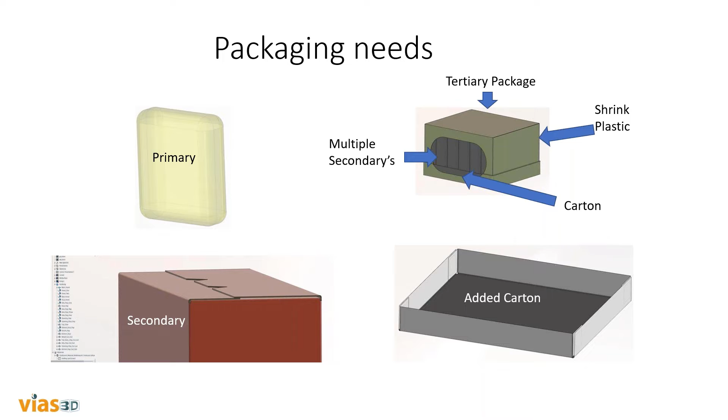And if you look at packaging design, you can see that, first of all, I've got a flat panel and then a bunch of edges up or flange ups. And that's pretty much how this one's made. And then I've got some cutouts. And this particular one I parameterized everything. So anything that you want to control from a parameter you can. And later on, we're going to dip our toe into simulation and look at how that can be optimized.

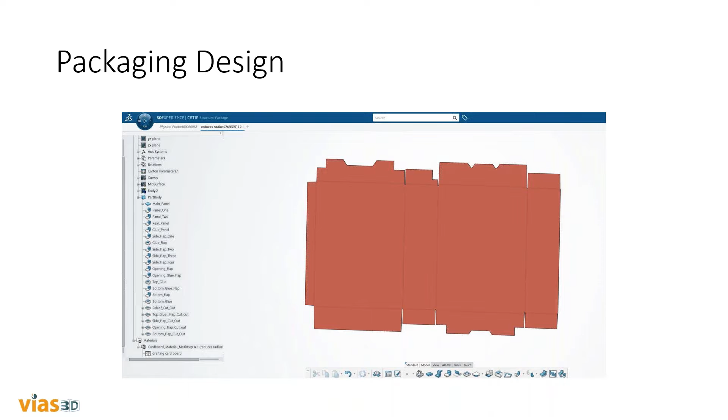Some of the tools that we can use, and these will look familiar to you. The carton parameters is right where it starts. You have a choice to use solid material or perforated material or corrugated cardboard. So you can use either, and there's some rules, and we'll look at what those rules look like in the next couple of slides. And you can put any number of rules in. It's simple to do, and there's not a lot of scripting needed. You can just add stuff.

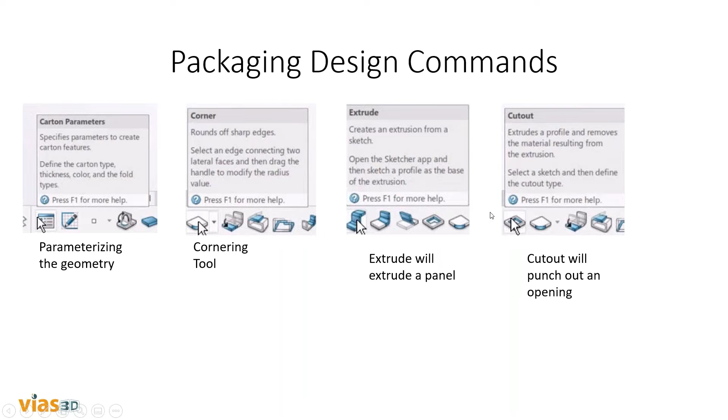So then we have, of course, a corner extrude, which will extrude a panel up, and then a cutout, any kind of a cutout that you're going to make. Fold and unfold, of course, is paramount to this whole thing. We're trying to get a flat pattern to maybe use on a cutting plotter, or you're going to create a die for it, a steel rule die or something like that. So you also have fold, which is going to fold from a line just like it does in sheet metal.

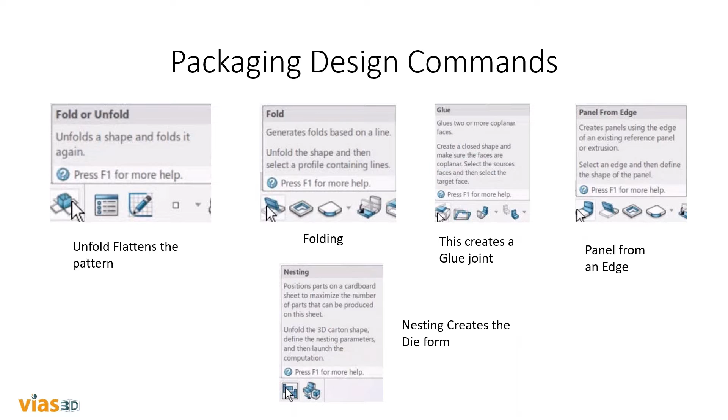So the panel definition, again, allows you to choose from full or corrugated. Full is just a solid thickness. You can choose the thickness of the material, and it comes with default rules, which are pretty simple and actually pretty accurate. So you can create different rules here if you had a different material type, depending on what you were doing. Maybe you've got cardboard with wax coating, or corrugated with plastic. These things would create different rules.

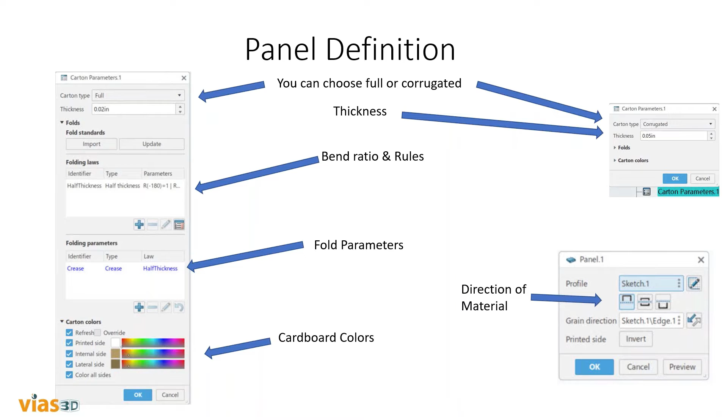And then of course the colors of your cardboard. When you choose cardboard, it's usually one color on one side and another color on the other, so it's easy to see what's folded. And then of course we have our panel up. Just like anything in CATIA, you can go either direction on the sketch. You can be in the center of it, on top of it or below it, and then you can invert it.

And then, like I said, my favorite function is the panel up function. This allows you to quickly take a square piece, panel up your edges and fold the box up very quickly. You can create boxes in just minutes by doing this, if you kind of have an idea of what your dimensions are.

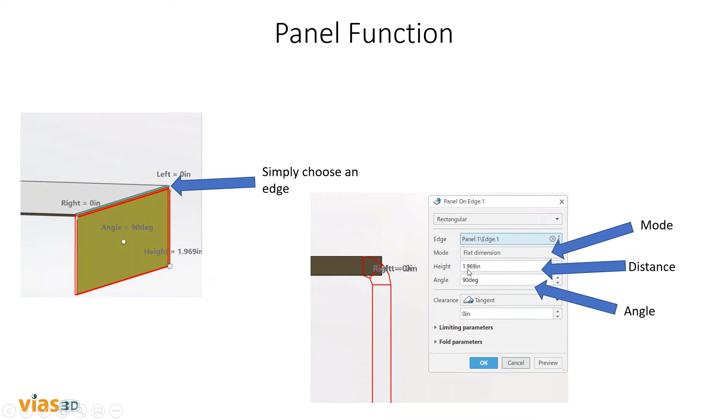Or maybe you have some standard box sizes that you can just put in. And again, all of these things can be parameterized. Well, at least height and angle can, and your tangent number. So obviously these are pull downs and choices, but the rest can be parameterized and connected just like any other parameter.

So the reason I like the panel up function is that you can control whether you're going above or below the area and have a number in there for that. Again, that can be controlled through a parameter. So it's really easy to make flaps just touch and get your exact corner radius. And this is where the cutout's important in the material. If you try to fold this up without a good radius here, it will tear, and you'll see it.

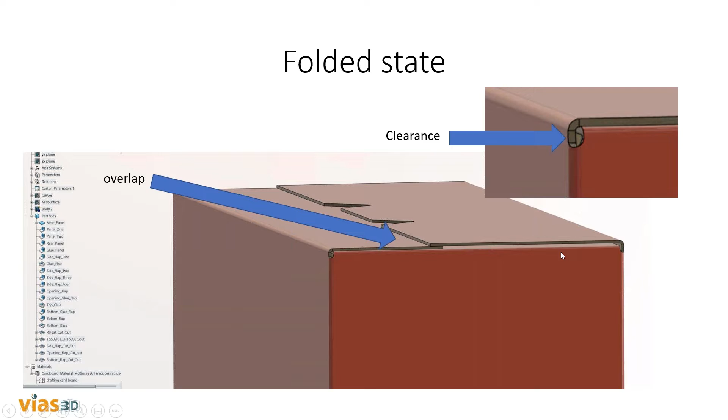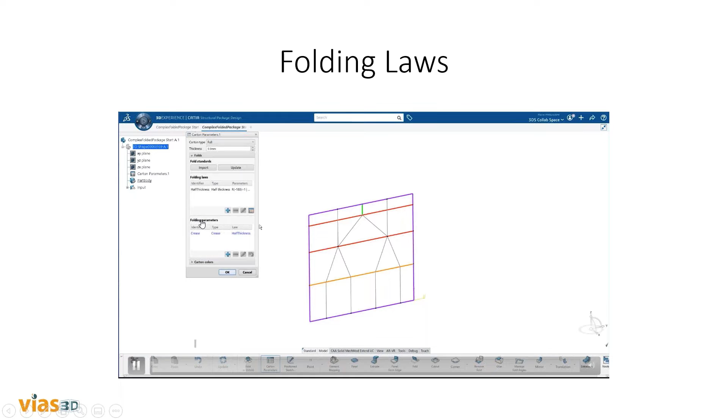And now we're going to get to the videos. So these videos do it a little bit differently. They don't work from a panel. These are going to work from taking a sketch with all the folds on it already. This one's kind of quick. You're just going to put in the rules and the laws, just like I showed you. And that's how you set that up. Tell it what type of material it's going to be and what your basic functions are going to be for rules. Here they're adding a rule, folding law. It's not that hard. If you know what your data is going to be, you can just put it in there. And so when it folds, it's going to follow that.

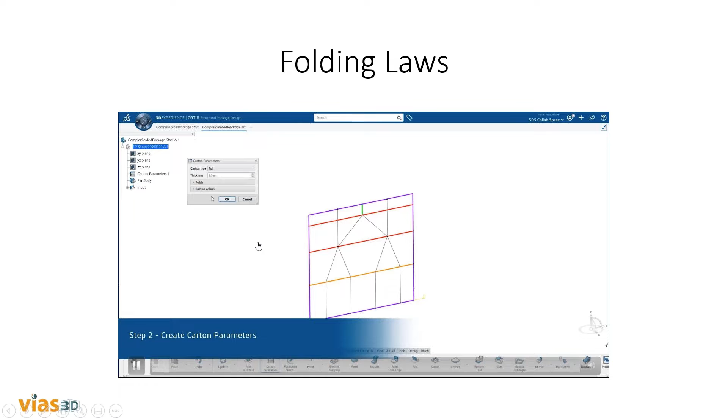So the next video is creating the panel. This is quick and easy. You just choose it. Again, you go up, top or bottom, make it go which direction you want, depending on how you're set up. And that's as simple as that.

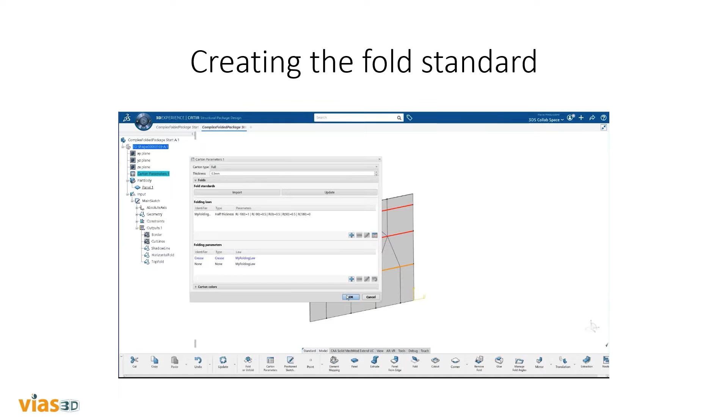Now, creating a folding standard, this is where you can start to use parameters, and what you can see is what you're going to be able to control here. This is where this tool becomes more important, because all material works a little bit differently, so you're going to have to come up with what works. And you can see that they've got 3 separate sketches here. One was the panel, one's the cross folds, and then the other folds. And they're going to control these folds a little bit differently. What they're going to show you is how every time you pick on an edge, you can choose different rules and laws.

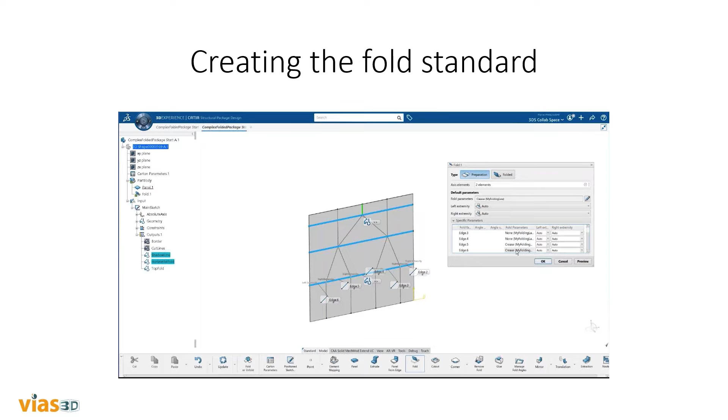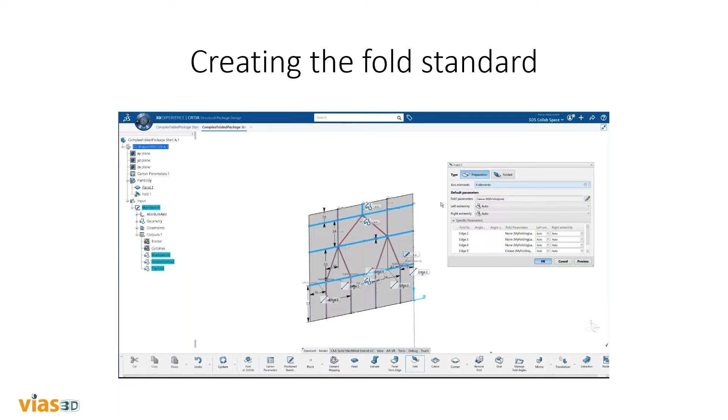This is great for control and optimization later, when you can parameterize these things and bring this into a simulation and see what happens, maybe putting material in it or something else, and you can make changes. Maybe your seams are too tight and they're going to tear once liquid's put in them. So there could be a lot of reasons why that might happen. And this is why the connection between design and simulation is important for packaging.

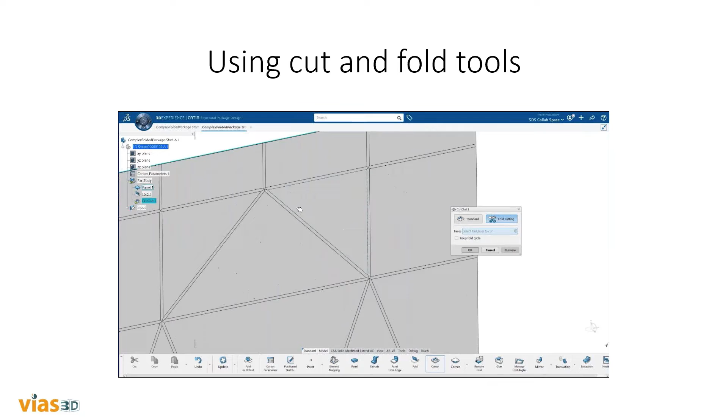I'm going to create some folding standards, using the cut and fold tool. So you have to make cuts. And so here, this is going to cut out where the folds are. It's not going to create a larger radius, but depending on what type of fold this is and how thin the material is, that might work fine, just cutting that out there. It's a pretty simple tool.

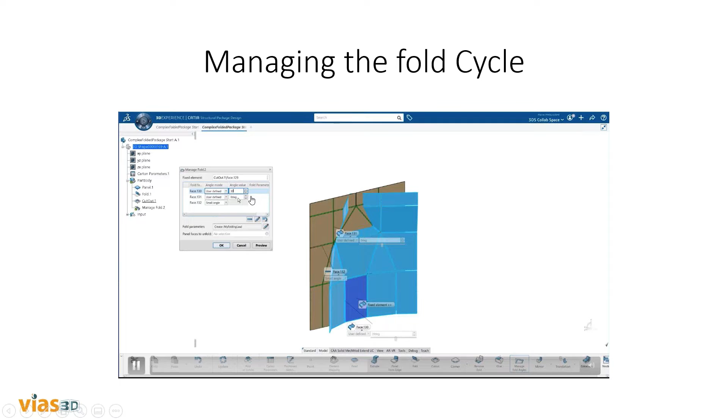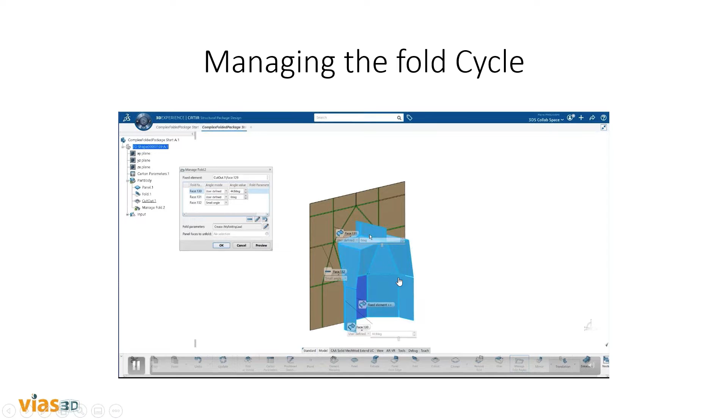Managing the fold cycle, this is where it gets a little bit more complicated. So you can see this is where you can actually keep this up and adjust these, and you'll get a ghosted image to show you what it's going to look like folded, right? Just like that. So you can actually use the adjust button up or down, and they'll do that here. Get it right where they wanted to put it. So you can adjust those up and down just to see what the result's going to be like, and then go from there.

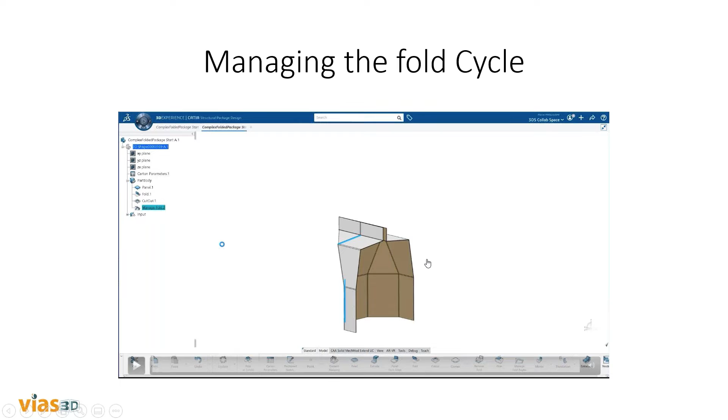Okay, so the mirror function is pretty simple. They show this twice. I cut out one of the videos because I think everybody knows how to do this. It's just good design, for anything that's going to have symmetry to it, to only design the areas that you need to. It's a lot easier to control. And if you don't have to draw the entire thing, why do it?

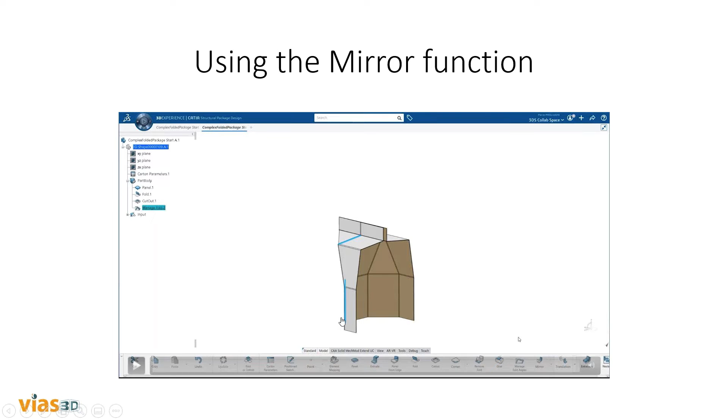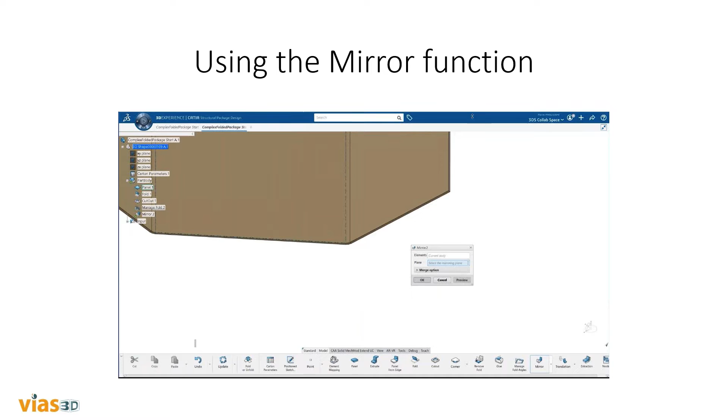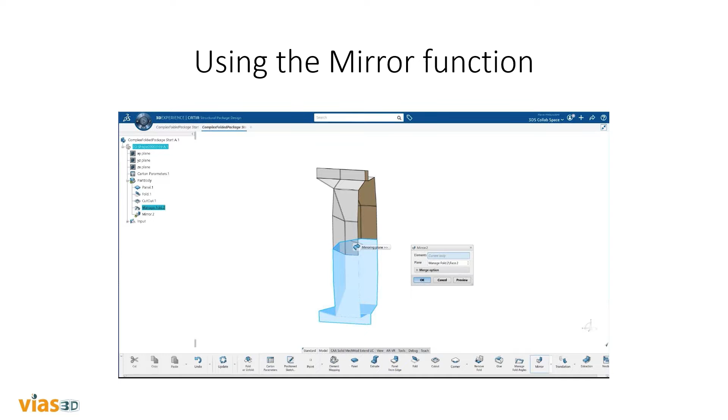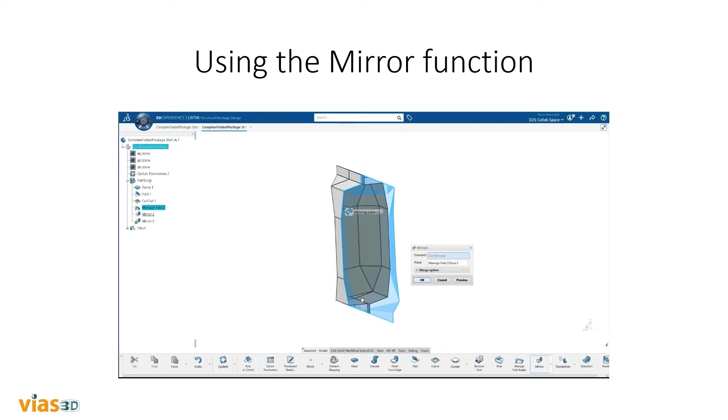So this is kind of a basic function here they're going to show. Not much you guys don't know. In this case, they drew a quarter of it, and you're just going to mirror it right on the edge. And then all this. So this happens to be like a protein drink type of a box made out of paper. And you'll see in the next couple videos what it's supposed to look like and how they come up with it. So this is probably very thin cardboard with a wax coating. Right? And so then you get your whole piece.

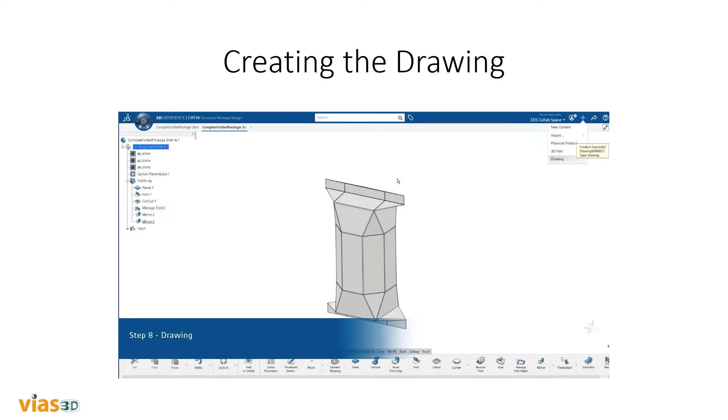So once you've got your complete component, putting this on a drawing is really simple. You just unfold it, if you're looking for a DXF file, or you're going to just plug it straight into a cut machine, or whether you're going to nest it. So create your flat pattern. Just choose it. Tell it you want it in the open.

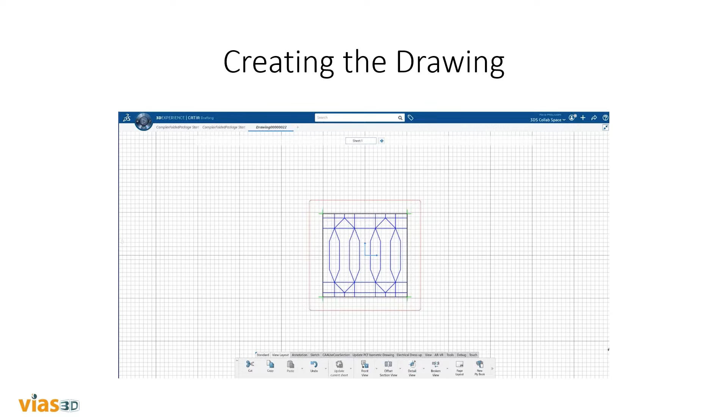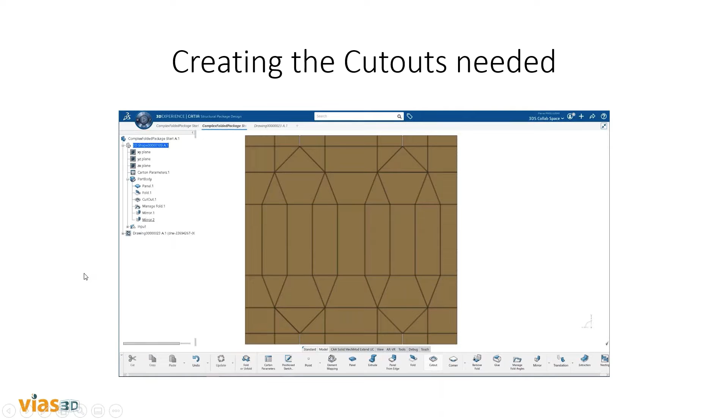And of course, our idea here isn't to show you drawing, but this will give you that pretty easy, so you know what it's supposed to look like. And you can see what they started out with looked much different because they were just doing the quarter of it. But now we can see what it looks like completely unfolded. Okay. Creating more cutouts. They're just going to create these cutouts so they can fold it up.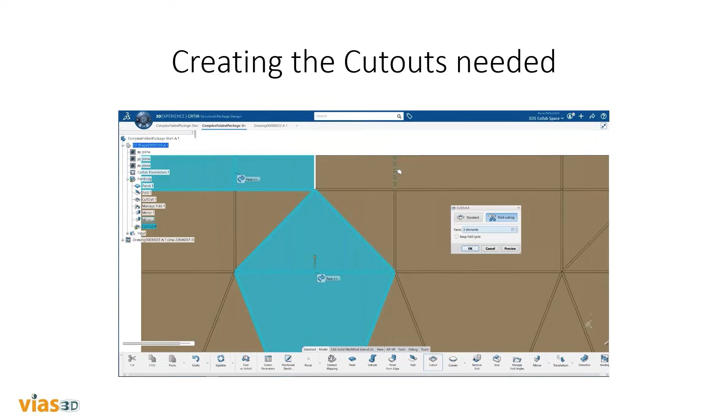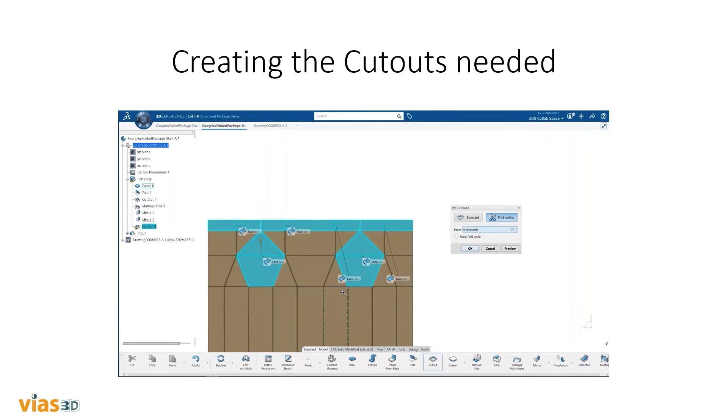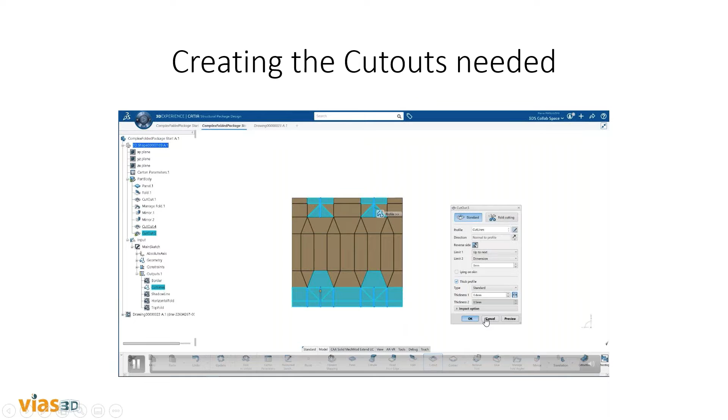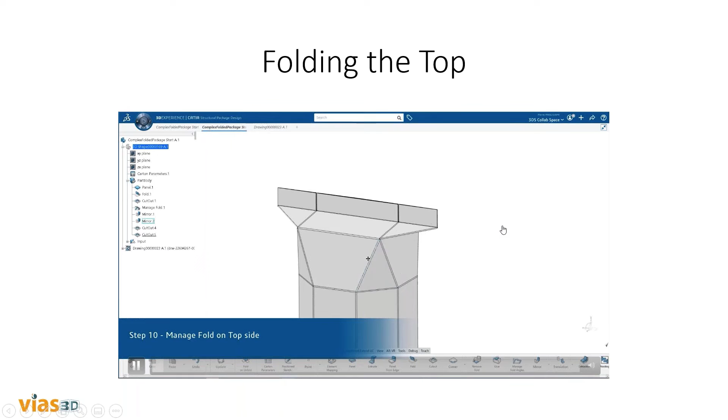And of course, you'll use symmetry on that too. So what you'll find is, if you dig deep into all the tools, you have a lot of options. Okay, so now they're going to fold up the top because we created this and it's still not completely done. So now they're going to create folds for the top. This gets a little more complicated. As you know, if you've ever tried to fold paper together, the more you fold it, the more difficult it becomes. So now is where rules become important.

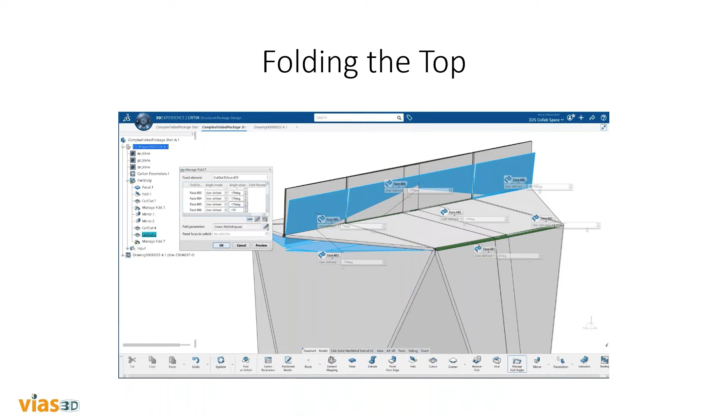They're going to overbend it so that they can fold it over top of itself. Because remember, this isn't bent with any equipment. It's just pre-trimmed and somebody's got to fold this or a machine's got to fold it. So they have to give it enough angle to get that fold flexible enough to fold in a second direction. And this is where your control is just fantastic. You can see each fold and it gives you what we call a ghost view of what it's going to do.

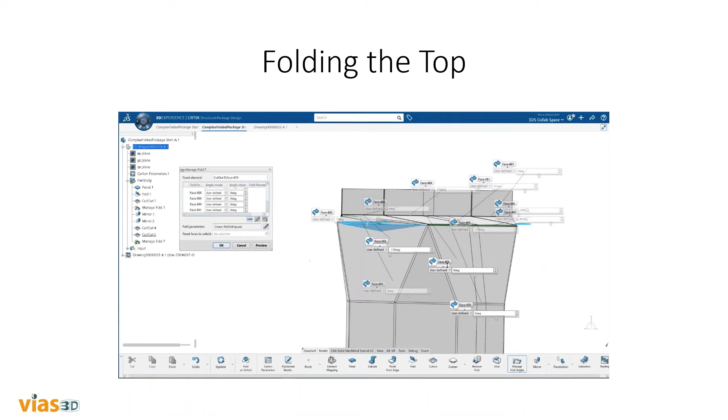And see, you can control these on the screen just as well as you can over here. Let's throw it up. This one takes a few minutes. This is one of the longer videos, but it gives you an understanding, because this would be something difficult to engineer otherwise. You'd have to do some physical testing. Here you don't. You're going to get a pretty close representation of what you're actually going to get.

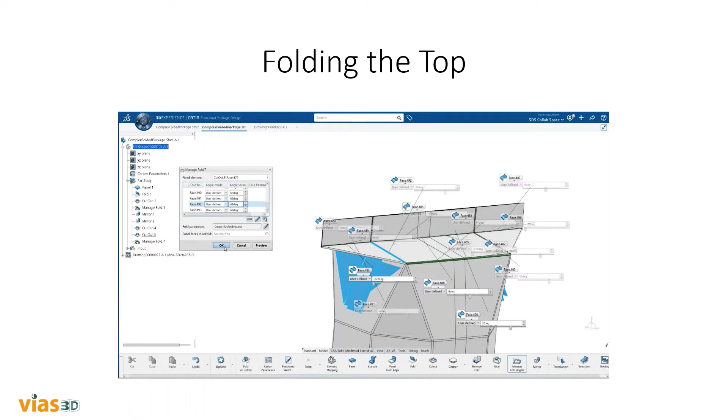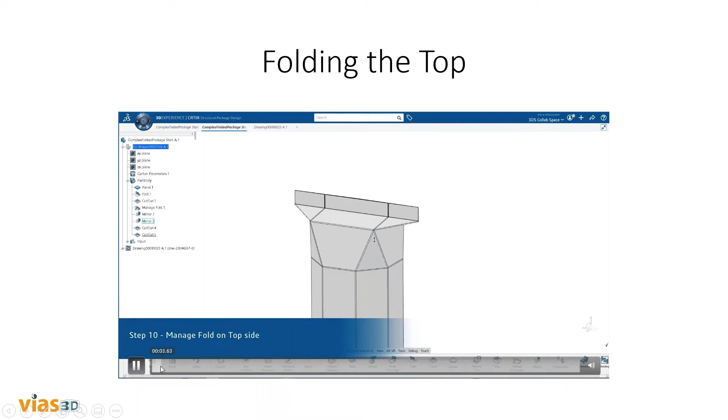They're making it look easy, but this will take a little practice. Most of the boxes I've designed from a panel up. Doing it this way takes a little more expertise and practice. But as you can see, you get the result, and you can see what the flap overhang is going to be. Actually, let's get back to that real quick, just zoom down to it, to give you an idea of what I'm talking about. Let's go a little further. So you can see the overlap that you're going to get. It's going to be realistic.

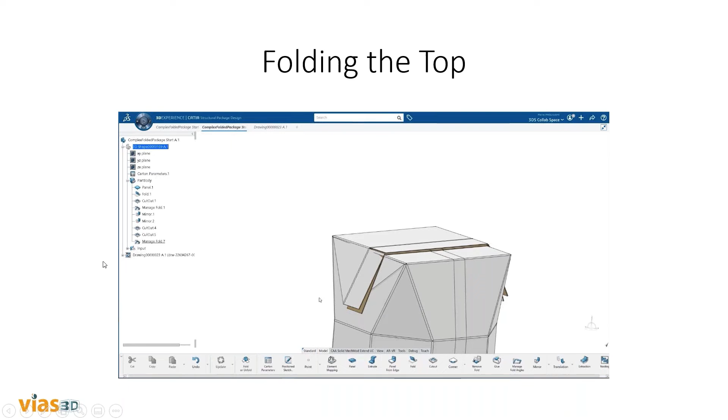You can make your product look perfect in CAD if you're not using rules, and it would fit perfectly flat and even, but it wouldn't be right. So this is where the bend rules come into play. And with this application, it will save you a lot of time and money.

So one of my favorite parts of this video is what they do with the label. The labels are put on with the texture tool, which, if anybody's used the texture tool, you know it's kind of easy to flip the direction and move things around. And in this one here, we've got some great tools.

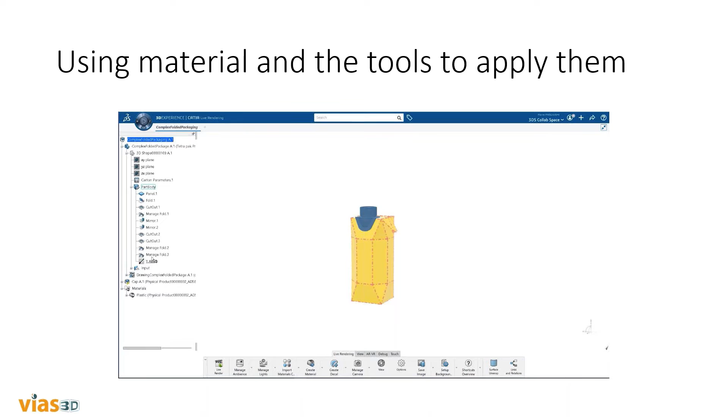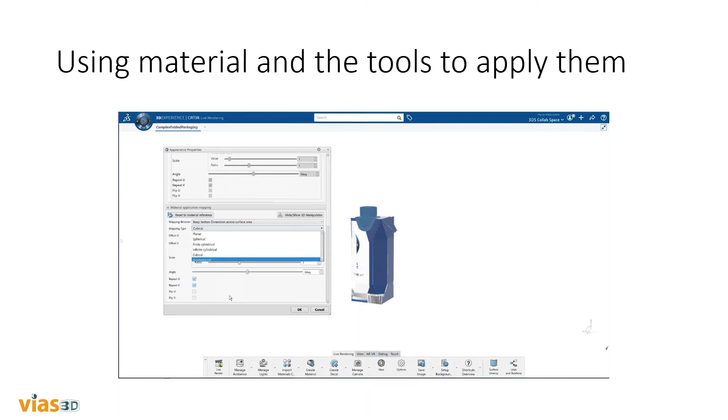So we're going to pick the surface, and they didn't show you the cutout and the plastic part that they added to it. That wasn't part of this demonstration, but that would have been an extra operation. And you can see, if I can stop it right there, it's sideways. And so you can just flip these around in this app. They're just going to put it 90 degrees here.

And these slide bars will allow you to adjust it up and down and back and forth. It's the biggest problem with trying to put a label or a sticker on. This is a great application to do that. It works really well, and looks great when it's done. And so that is creating that box. And you can see in this case, these flaps kind of hang down like you wouldn't want them to.

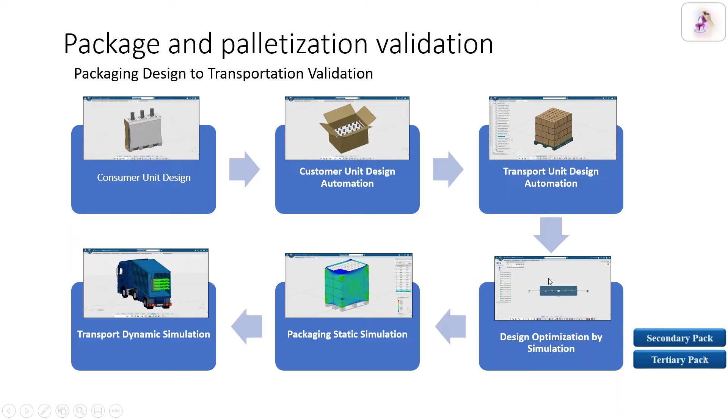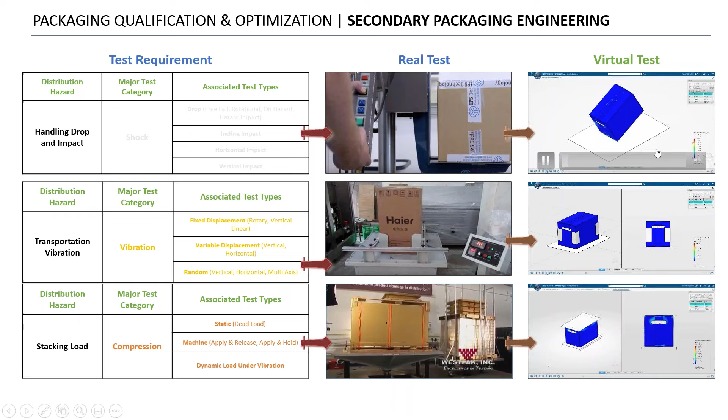So that being said, some traditional methods of handling this have been physical testing, as you can see. They have handling and drop and impact, transportation vibration, and stacking and loading. And in the past, companies have spent a ton of money testing like this. When really we can do it like this, because you're building a realistic package, you've just designed your package in CATIA package design. It's all parameterized, and it's realistic. The corrugated is simulated like corrugated, and the solid is simulated like solid.

So now things like plastic can be added to it, and you can see what happens when you drop it. You can see the drop test. You can see transportation and vibration, what happens to things over time. And then, of course, stacking and loading. And this is a big one. I mean, how much can you get into a warehouse? And if you think about this on a really large scale, there's a lot of money at stake.

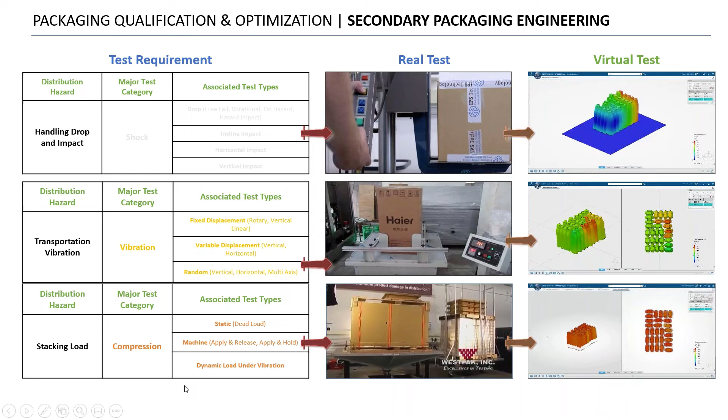Even right down to, if you're making aerospace products and they're getting to your customer, if they get damaged, it's a problem. So it's kind of an important step going forward. Simulation for this is big, and you can look at the palletization of it and what the weight of that is. You're going to know what the weight of that is ahead of time. You can look at that from a cost standpoint of shipping and how you get it there. So that's kind of important.

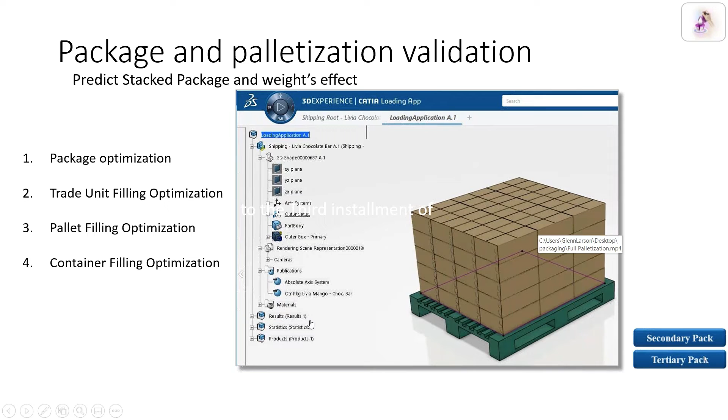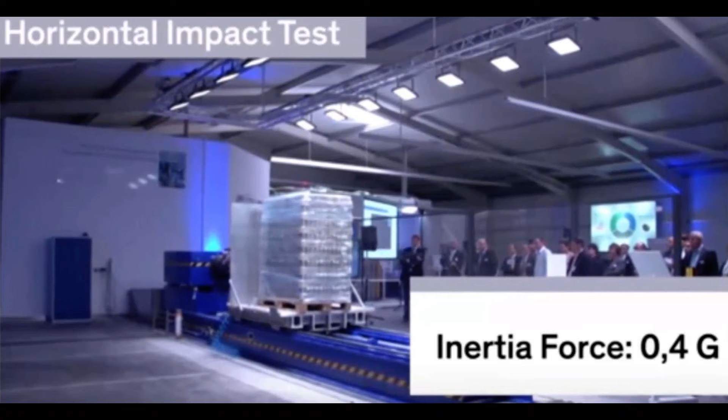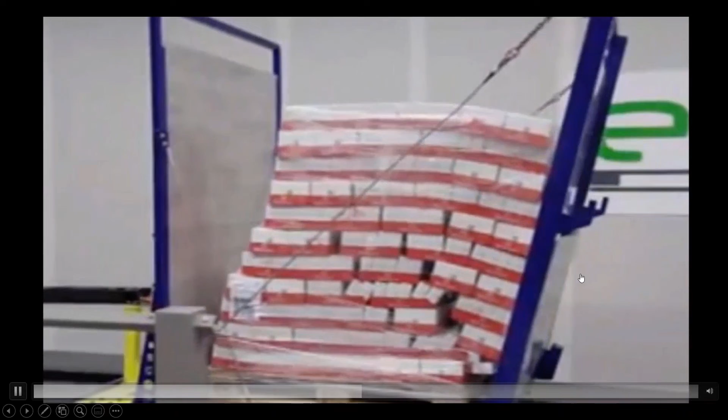So another one was a stop test. You can see this elaborate design to look at stop test. Everybody's standing around wowing how cool that is. Well, it's not necessary. It can be done in software today. You can at least get really, really close. Something happens out in the field, it might be the outlier. And it's just a mess of money being spent in packaging.

Some of the other things to consider are the reduction of plastic. Companies have incentives financially, tax-wise, to get rid of plastic. So all the plastic that can be eliminated, but it's not reusable plastic, they get a bonus for it. So it's kind of a good thing. And sometimes the expense of cardboard, adding extra cardboard, can we reduce the size of the box?

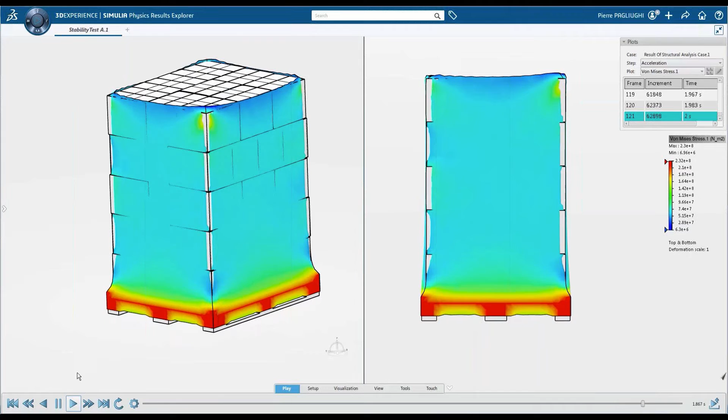So here you can see how this is done in simulation. Again, because you've designed a package in CATIA package design, it's correct. And in Simulia, it's gonna show us what's gonna happen if you've got the real data in here. And when I say that, you kind of need to know what it's gonna go through. One way of doing that is literally throwing an accelerometer in a package and shipping it and finding out. And then you get some real data on how far your package has to ship.

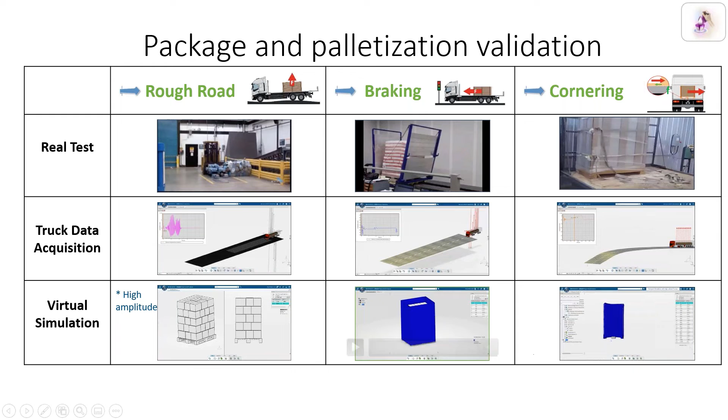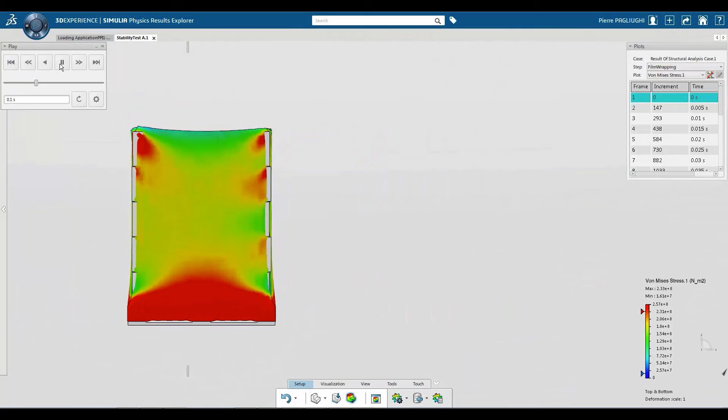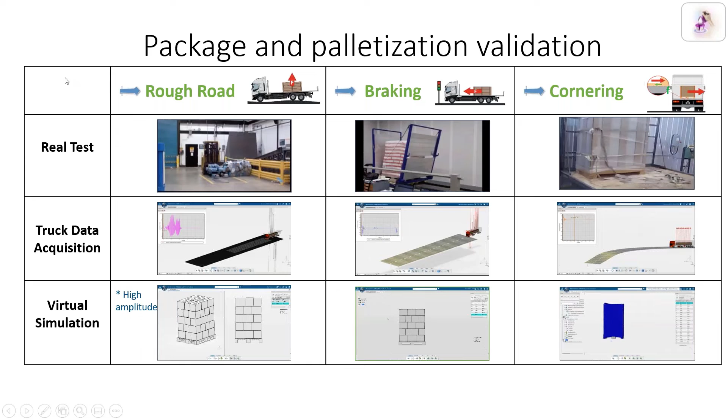But we can look and see here, shrink wrap. How much shrink wrap do you need to use? Do we have not enough? Are we wasting it? It's important. How hard of a stop can it take before it goes? You can keep increasing that until it does. And so that's kind of an important step, because remember, none of this stuff's bolted on. It's all just held on by plastic there. So those are just some things I wanted to show you.

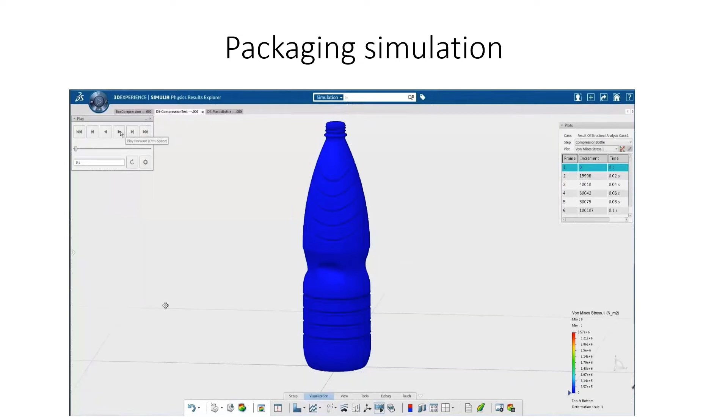And I have this kind of a quick video that just gives you a snapshot into the world of simulation. We're going to do a full webinar on this as well, which is going to show us, from building and creating a package and package design all the way through the different simulations that it might take. And just to give some ideas for those of you in manufacturing, if you're doing injection molding and things, the stuff can be designed from a level that gives you a realistic view of what's going to happen.

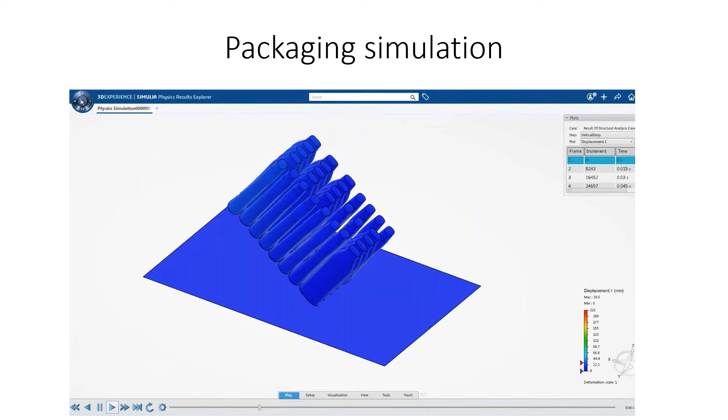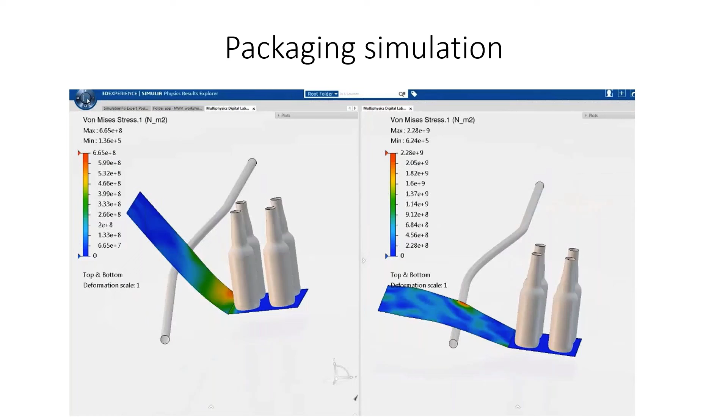Blow molding, dropping something on the floor. Of course, we saw the shrink wrap and the crush testing. Filling things up with material, hot material, cold material. What happens when you're trying to run something down an assembly line, or filling it up. This is all possible in the same platform.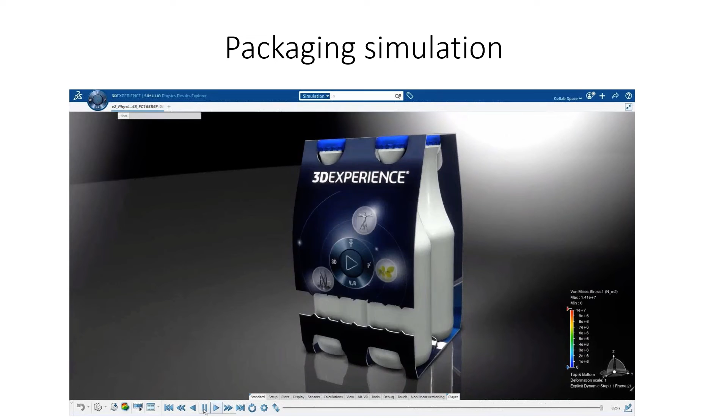All of the models and designs that we do in design move right straight forward, and there's a tear design on a package. You can see how much force it takes to rip it open. If they drop that, will it rip on its own? And these are all things that you need to know, and can save any company a ton of money by not finding out the hard way on what happens there.

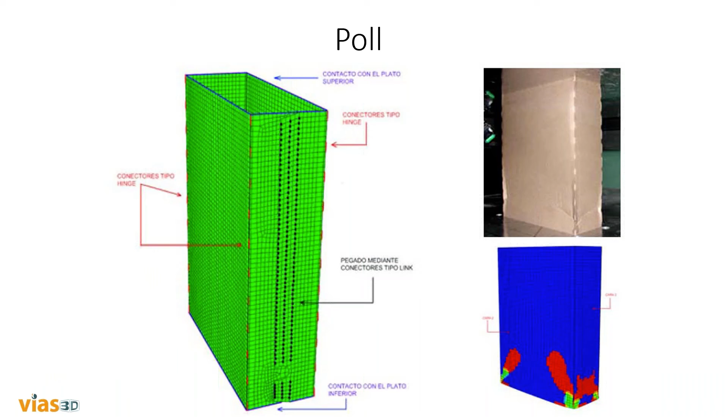So again, if you guys have any questions, please go ahead and put them in the chat window right now. Glenn, I do have a couple of questions. Whoa, okay. Let's take care of that first. The question says, you showed packaging for food products. Does this apply to me? I'm in aerospace. Well, yeah, I would say yeah.

So I come from aerospace, and I can remember, as the head of the engineering department, we got requests all the time from shipping. Now it depends on what you're shipping, right? Sometimes with your bigger components and products like that, you're designing crates and not as much actual boxing. But if you're shipping maybe pre-assembled components for the F-35, you probably want some boxing and packaging. And I know we used to let the people down in the packaging department just figure that out, but really it should be done from a design level, in my opinion.

So it's easy to do. It just doesn't take a lot of time, and I think it's a worthy endeavor for any industry. Again, it depends on the products you're shipping, because if you're just crating, then you would use just a regular design app. You wouldn't use the packaging boxing app, but you could still simulate that.

So that's an important thing, is you can look at what happens if you were to crate something up and use a material to support it. You could probably simulate that and find out if that'll make it there without getting scratched or dented. Because I know in aerospace, you can't have a scratch on anything. So that's one way of looking at it. Thank you, Glenn. We've got more questions.